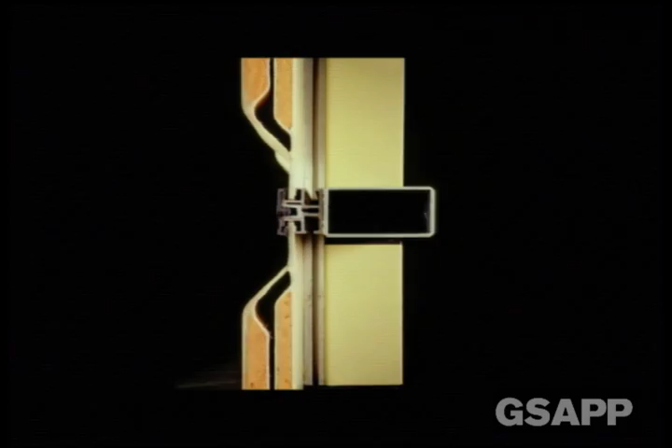We got the big job, or possibly one of the best jobs in Europe at the time, which was the international train station at Waterloo, connected to the Channel Tunnel. Very exciting job to win. We fought tooth and nail to get it, and it took us the best part of 5 years to do.

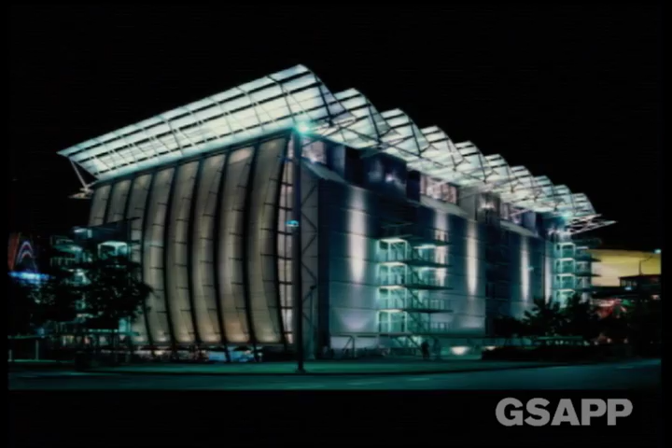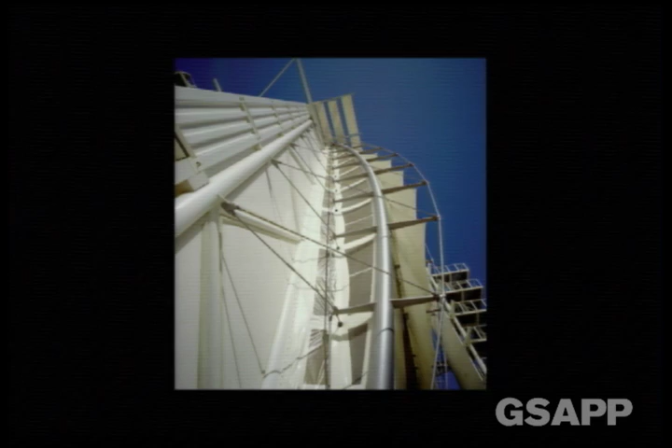Finishing it in '93. At the same time as that was going on, we won the competition for the British Pavilion in Expo 92 in Seville, and that whole project was based on the idea of energy saving, sustainability, and recognition of how architecture could work to help climate issues. Spain, Seville particularly, being the hottest city in Europe, but people had lived there quite happily for centuries.

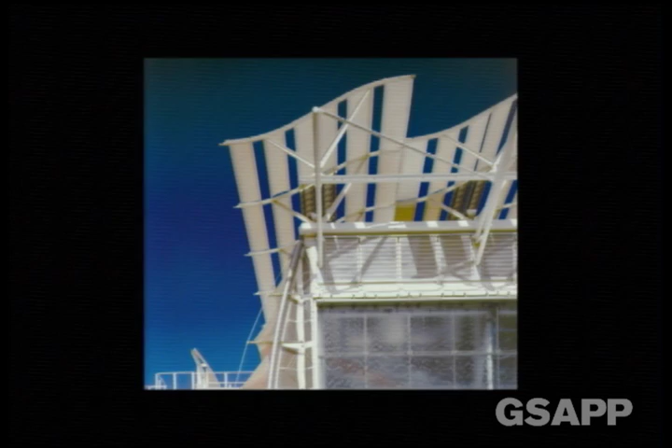So it wasn't an impossible environment to live in. We had to show, well, we tried to show how modern materials and modern technology could be used to make an acceptable environment. So there we are, sitting with these two pretty experimental, quite daring buildings behind us, and we started to expand and be recognised abroad.

It drew us to our first building in America, which was the Plant Science Centre in St. Louis, I should say, for Americans present. And that building itself was an interesting exercise.

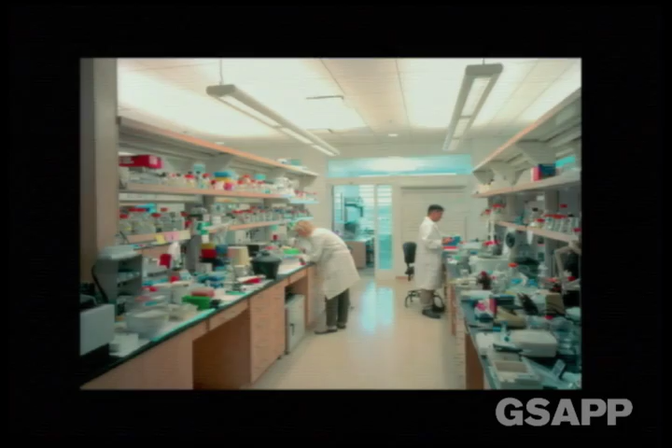Because we had the key thing, which of course was the laboratories, but we had to use the building to try and make an acceptable environment for the people working there, mainly hundreds of PhDs, who were in a pretty remote site in terms of America and in terms of St. Louis.

And we had to make their life acceptable. So we made quite a grand environment in terms of an atrium and a really nice lecture hall and library and so on. But we tried to, although this was a highly modern building, make it a really humane background. So it was technology working for human beings, in my view.

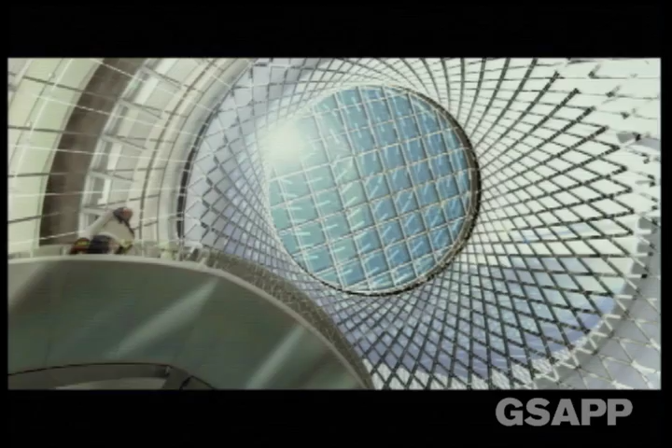And I think Andrew will be saying a bit more about this later on. But our life in America then went on, and as you know, we're about to open the Fulton Center, which is a huge transport exchange downtown. We've done the Queen's Art Gallery, converting the ice rink that was Flushing Meadow into a fine new art gallery. We've done Via Verde, which was quite an experimental scheme in low-cost living with planting on the roof.

I suppose a lot of our work has been in the field of public buildings. I like to say the public good, buildings for the public good, but a lot of it has been in transport, which the public does experience on a very big scale.

And I don't know, I may be naive, but I feel that if people go to work every day and they pass good details, it makes them feel better. If they see a horrible, cheap, bland building, it makes them feel worse. Perhaps I'm naive, perhaps that's a subject for discussion, something Andrew might dwell on a little later on. Anyway, I just would like to end by saying that we're a dedicated group.

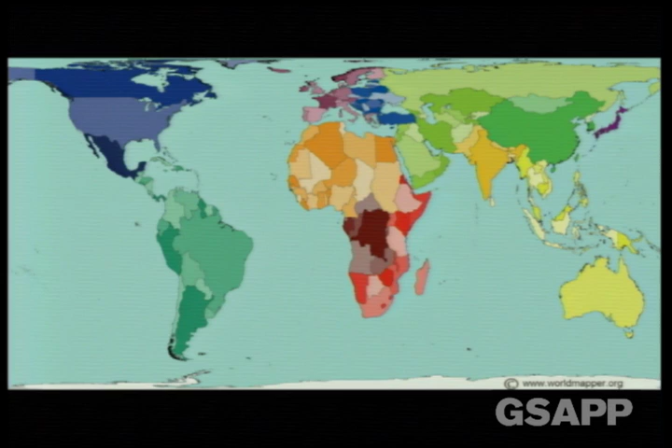So this is the way we're used to seeing the planet mapped from a 3D to a 2D projection. This is a different way of mapping it, instead of landmass, by population. And so what you immediately read is that half the population are living in one part of the planet, so we have some very dense areas of population.

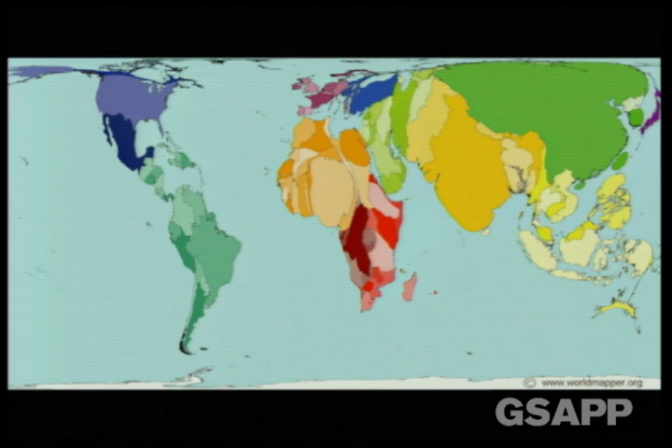But I find it even more interesting to then map against time. And to think of the planet as 4.54 billion years is a difficult thing to comprehend, and what our impact has been on it in that time.

So if you think of the planet and those 4.5 billion years as a year, then it's much more understandable. Basically humans appeared, as far as we can tell, 15 minutes before midnight on the last day of the year. And the start of recorded history is actually 30 seconds before midnight.

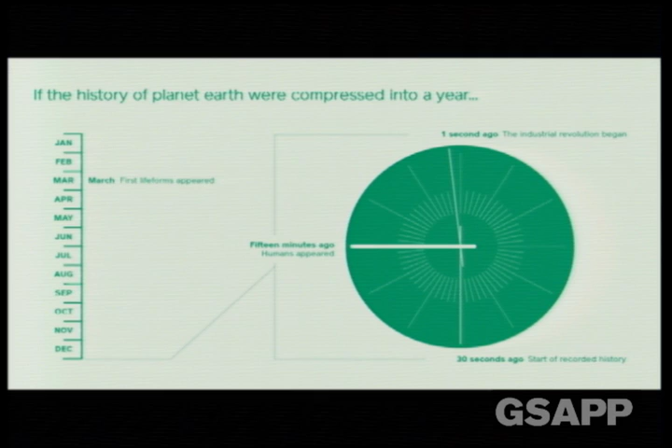But the most important part is the Industrial Revolution. Within the time frame of a year on the history's life, it happened 1 second before midnight, which means the whole impact of global warming and what we've managed to do over the last 2 generations happened within about a blink of an eye within a year.

I was tempted to talk about weird architecture, but I'm not tonight. So I am going to talk about nature and things that I think could inspire us to look for solutions.

For me, a few years ago, I went on a research trip in the Amazon. We've done, obviously, the Eden Project, and some other similar projects. And I had the good fortune to explore and spend time in that part of the world with a very famous biologist called David Campbell, who's written many books. This is David here, on the Amazon.

And like many, I'd rather foolishly believed that the reason it's the most biodiverse part of the planet is because it has a very rich set of nutrients that can support this rich, biodiverse set of life forms, plants, animals, insects, etc. And of course, this tree tells us that actually it's all built on a few inches of very sandy soil with almost no nutrients, hence why you have buttress trees and so on.

And the reason it can actually survive and support that ecosystem is really 2 main parts. One is that it's extremely efficient in how it uses resources, but also it's ingenious in how it uses those resources. For me, those are the 2 areas we need to focus on - it's not just efficiency, but ingenuity. And if you ever get a chance to read David's book, A Land of Ghosts, it's a very inspirational piece of writing.

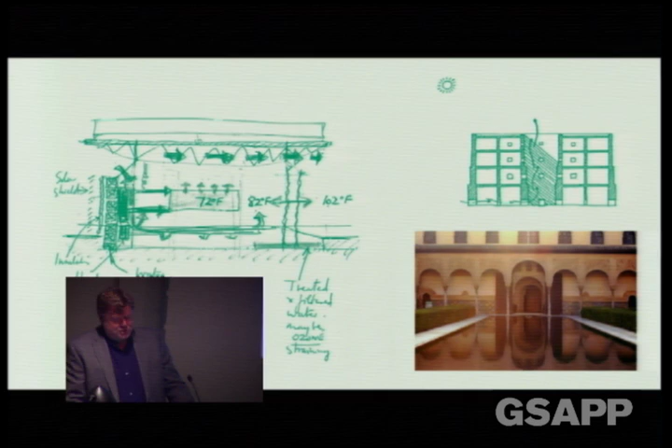And you see he still works in Fahrenheit, which is very nice. The outside is 102 in Spain, generally, often. The idea was creating layers and buffers rather than trying to condition a space, and trying to create an ecosystem that really also learned from the prevailing traditional architecture, where often what you find is there's an understanding of how you can create microclimates.

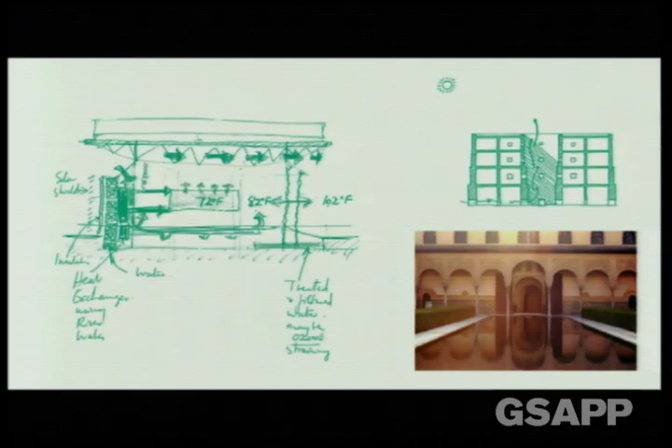Another example of a project looking at how you can actually use, if you like, solar gain as part of an environmental system. This is another kind of experimental project we did. Of course, you'll know that PVs aren't particularly efficient, they're only 18% to maybe 20% efficiency, whereas if you can actually use heat, it's a much more effective way of harnessing the sun.

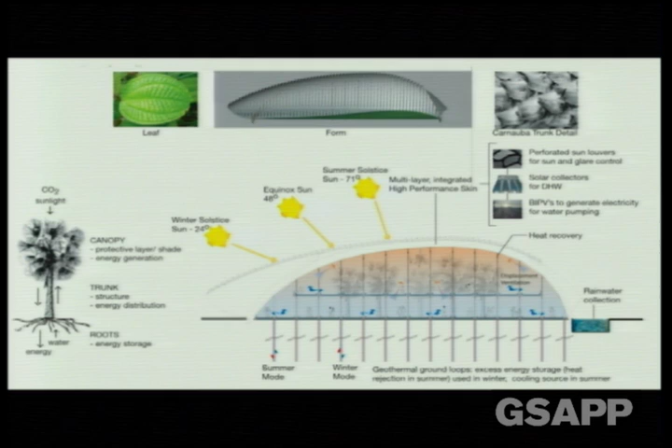We were really intrigued on how you could effectively create a roof structure that might, through a biomimicry way, use photosynthesis to create energy and run the building systems. Here we were using very efficient solar collectors, up to 80% efficient, to generate a great deal of heat that could then be used as part of a heat storage system for the colder part of the year, but also as part of an absorption chilling system. So we were using the heat to cool the building.

It was very much an experimental idea, but it's something that we're now taking on, particularly in the Middle East, as part of an energy solution where you can actually use the sun to cool a building and create a building that can run almost as efficiently as a building in Europe.

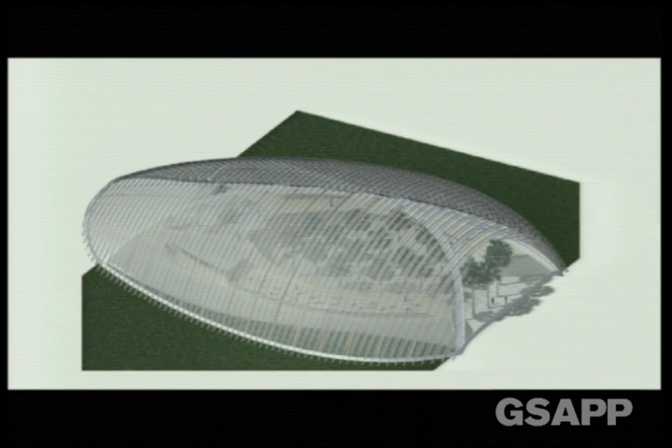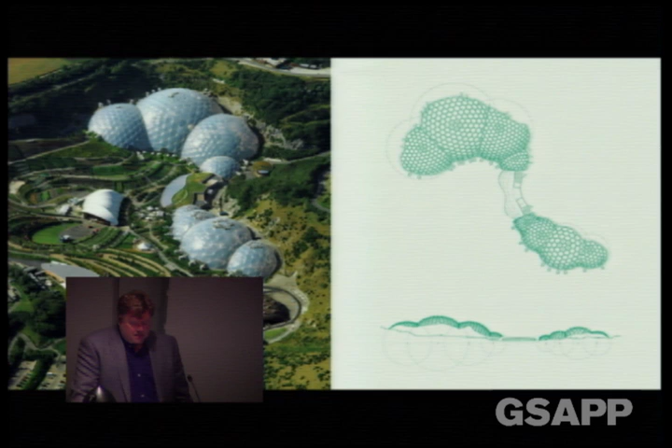So for my next theme, natural structures, looking at how we draw upon nature as an inspiration for efficient and very lightweight structural forms. Nick mentioned the Eden Project, which is a project I worked on for about 10 years from conception to final execution. There's actually a connection to New York, because when we set the New York office up, we set it up with a core team that did the Eden Project.

This was to celebrate the millennium. It was to look both at the UK's interest in botanical gardens and research into plants, but also to look forward to a future where we had an understanding of our relationship to the planet and the important part that plants play in that. Our brief was to create very large enclosures where we could create an entire tropical rainforest, the humid tropics, and different environments. The site was a disused clay quarry in Cornwall, in the southwest of England.

So it was quite a challenging site. It won't surprise you it was often used for science fiction films because there weren't many plants, it was this sort of white lunar landscape. We started with this as a site, very challenging, and the contractor looked at me and said, well, man has spent 100 years digging this very big hole, you're now asking me to fill it and reconstitute it in 18 months. So often it's a challenge, but that's what we did.

But again, for the enclosure and the buildings, the inspiration was very much about natural forms, and you see that throughout the buildings. I had an interest in a material called ETFE foil, ethylene tetrafluoroethylene, which is a polymer that's very lightweight, very strong and transparent.

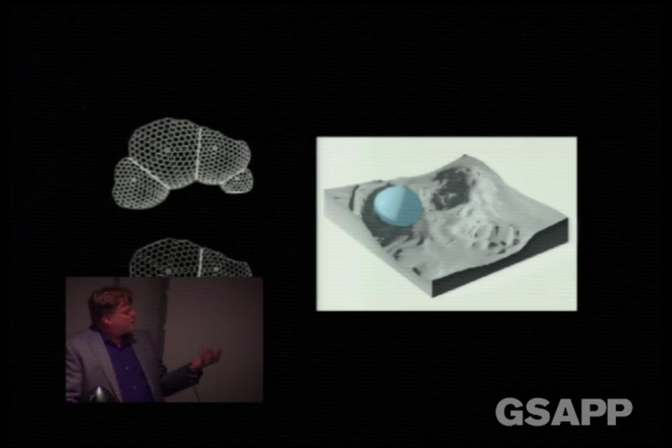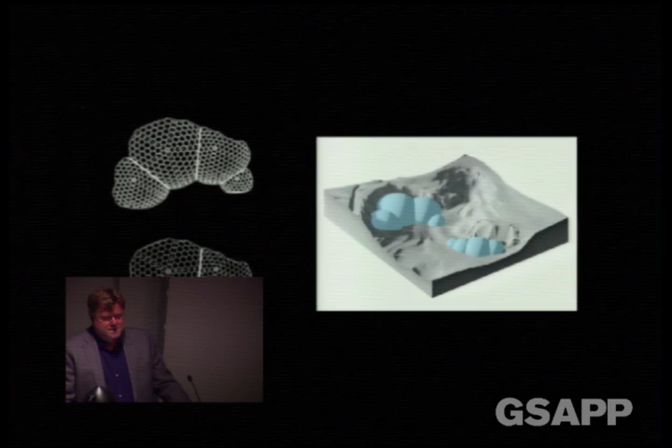So we took the site, the quarry, and modeled it in 3D and actually generated the buildings out of a series of spheres, and then took those spheres and interconnected them and then molded the enclosure and the topography. That's how we generated the whole form of Eden. It created the kind of maximum efficient enclosure, maximum space to the minimum surface area.

Throughout the building, you see how the structure is informed by natural forms. The way each of those elements join together is exactly the same way a dragonfly's wing works, with the same cellular structure and connections.

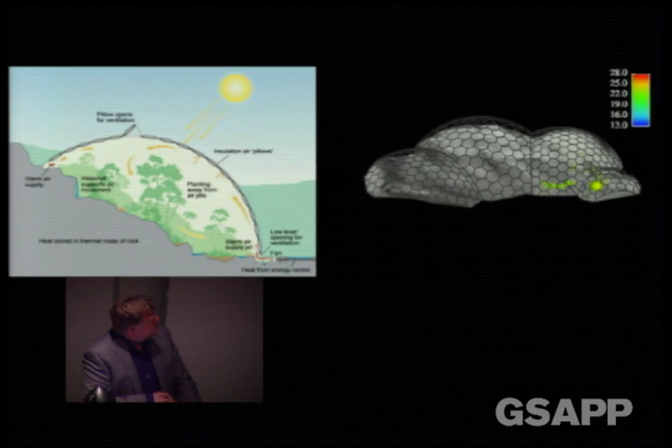That was the structural form, but we also used that form as part of the environmental system, modeling how air would move around the building. The size of the spheres relates to velocity and the color to temperature, looking at how we could use the building itself to direct the air and condition the space. I have to admit, it does look a little bit like a family planning video, but anyway, we'll move on.

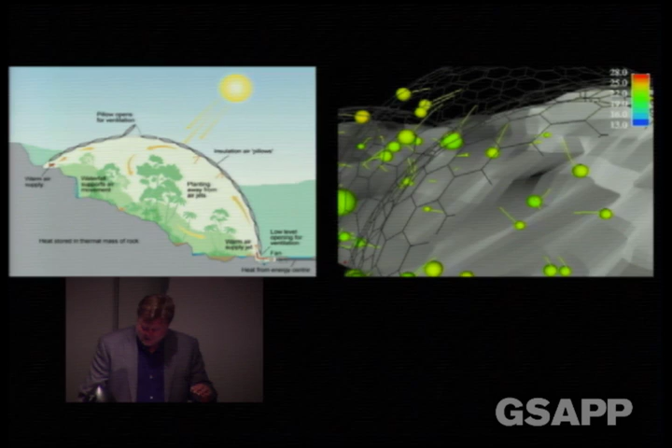Ultimately it was a very lightweight, very efficient structure with minimum environmental control systems. The steel tubes, the largest covering the 120-meter span, were only 8 inches in diameter, so quite lightweight. But ultimately it was really about ingenuity, about using the topography as half the architecture. We created the lightest weight enclosure to encapsulate this beautiful natural form, and it's the topography that gives the building its vibrancy. The end result is that the whole building weighs less than the air inside it, meaning we used a fraction of the material a glass and steel building would use—so it's also doing things as efficiently as we can environmentally.

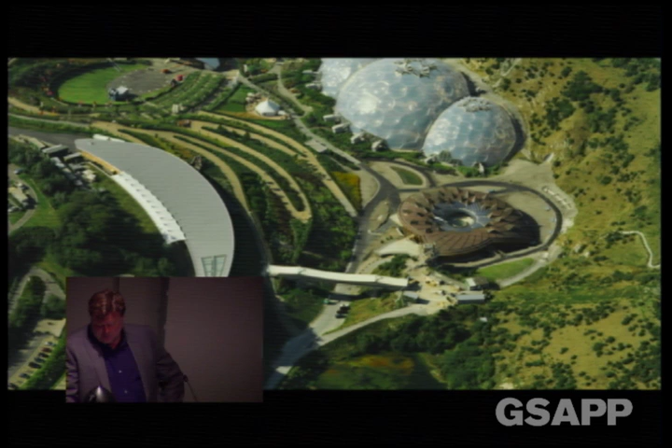We've had a great ongoing relationship with Eden, working with them for 12 years now on many buildings. One of the latest is the educational core. The lovely thing is that they have, at times, up to 2,000 school children a week coming to do some of their science curriculum at Eden. You can imagine it's a much better way to inspire a child to be interested in science to spend a day in the rainforest learning about biology than in front of a blackboard.

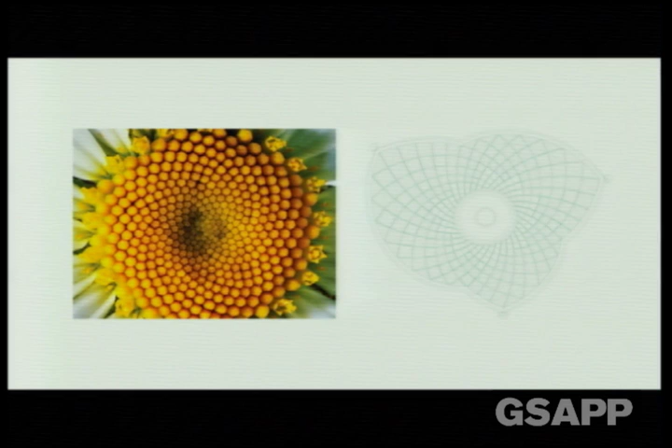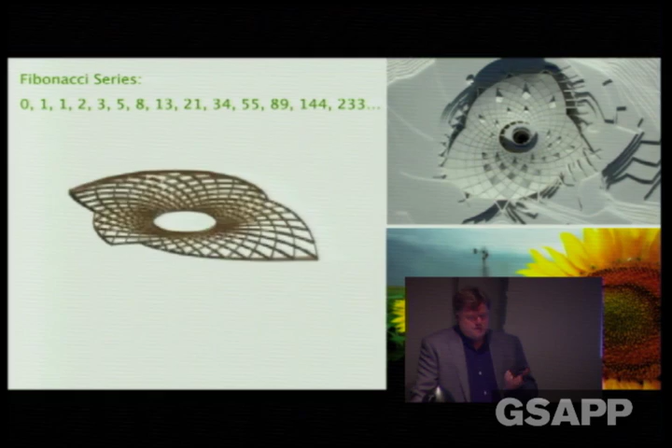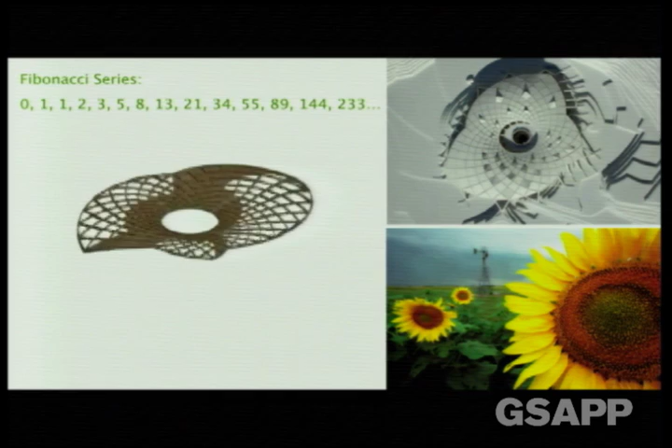So the idea of the building was to use its form itself as part of the teaching tools. The whole geometry and structure uses a Fibonacci sequence called the phyllotaxis spiral, a geometry found throughout nature as the most efficient way of packing in the maximum number of cells—the way a sunflower or many flowers grow outward. That's the geometric sequence we used to create the glue-laminated roof structure for Eden, so the building not only provides the facility for learning but tells the story of phyllotaxis, photosynthesis, and transpiration inherent in the building itself.

The next topic is connecting with nature, the biophilia hypothesis that E.O. Wilson put forward several years ago, and the importance of having a connection to nature in cities and throughout the places we work and live. It's something we feel is very important.

Eden is, of course, easy because it's all about nature, but even the very first building we built there used materials from the site—Gabion rocks, and clay extracted and turned into rammed earth walls. The whole building really grows out of the site, so as you walk through the spaces you're surrounded by the warmth of rammed earth and timber, giving you that real connection with nature.

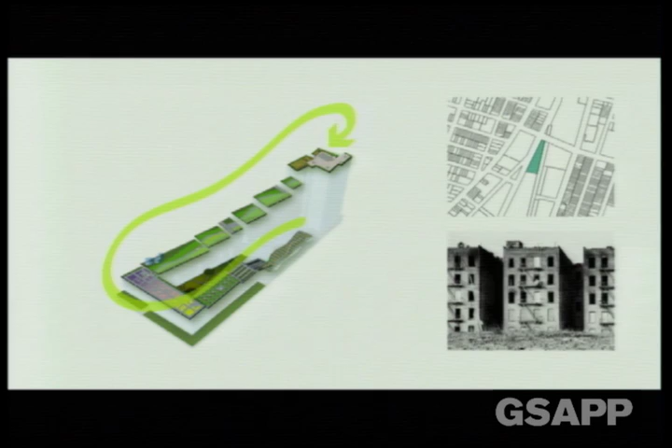And it's great to see it now emerging as a really vibrant part of New York. It's very rewarding for us to play a small part in that process. So we felt it was important to preserve those green spaces, but also allow people to have contact with them and create a kind of oasis.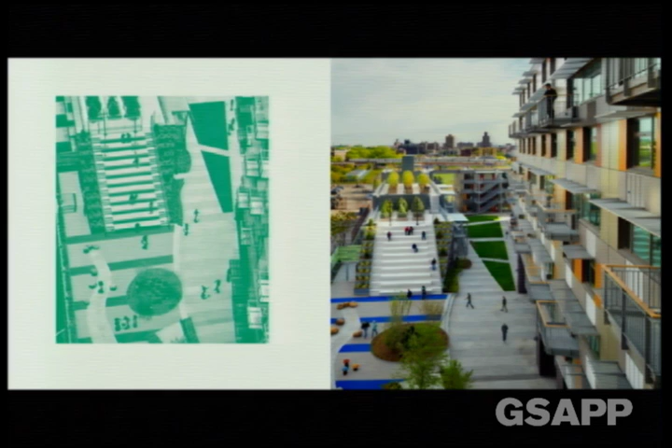The brief was for a whole series of different levels of subsidized housing, from rental housing to different levels of affordable-to-buy housing. There's an excellent book being produced by Lance Brown on the whole process, going through all the other competition entries and the evolution of the story. The interesting part is I think we were the only team that combined all of those different groups into one building, creating one community.

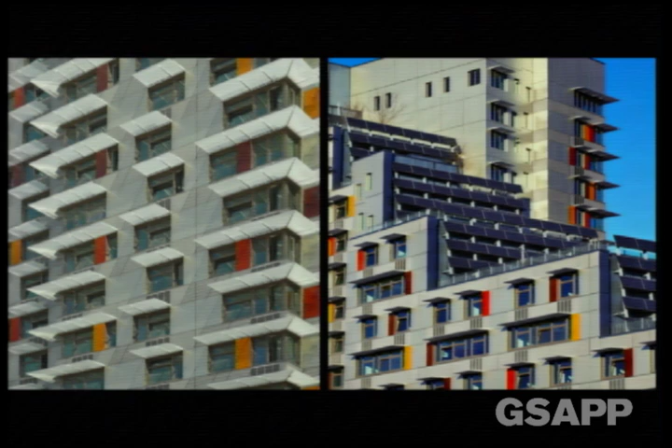I could talk about the prefabrication systems we used to keep the building cheap but efficient and well built. We had to build it for the same budget as New York public housing.

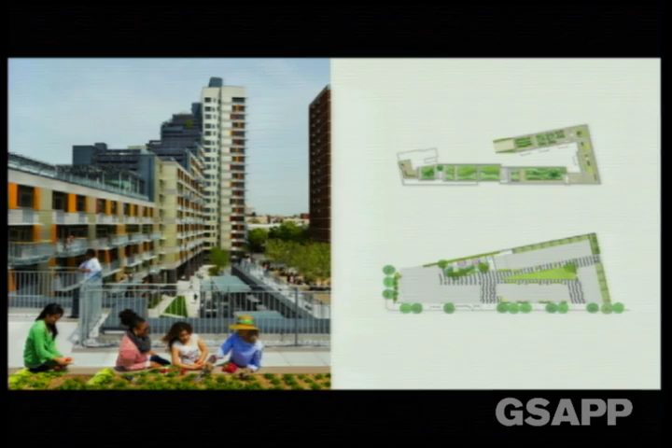But the one thing I really wanted to touch on with this project was the roofs and terracing gardens. Not only does it provide different facilities - an orchard, production gardens, recreation gardens - but it really forms the heart of the community, where people are growing food, and there's a farmer's market at the weekend where the produce is brought in. That connection with nature is as important as all the other aspects of the building, and it's something we look at in many different guises.

Earlier on you saw the Queens Museum of Art, which was very much about how you create a museum in a park setting and create a connection to the park. Finally, in two weeks' time, we're opening the Fulton Centre.

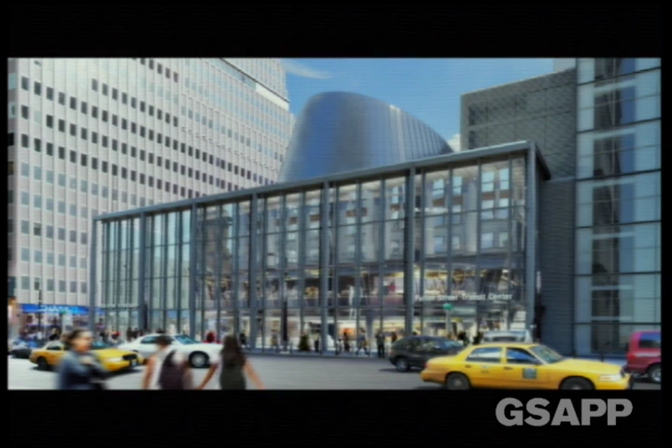I first came here to work on it in 2003, where I was told I had to move here within four weeks because it was a very urgent, rapid project. I had to move my family very quickly. We got here already with sleeves rolled up, and we're now finally opening it eleven years later. So not quite as fast as I thought, but the one thing I've learned is patience in New York is sometimes very important. But it was worth the wait, I think.

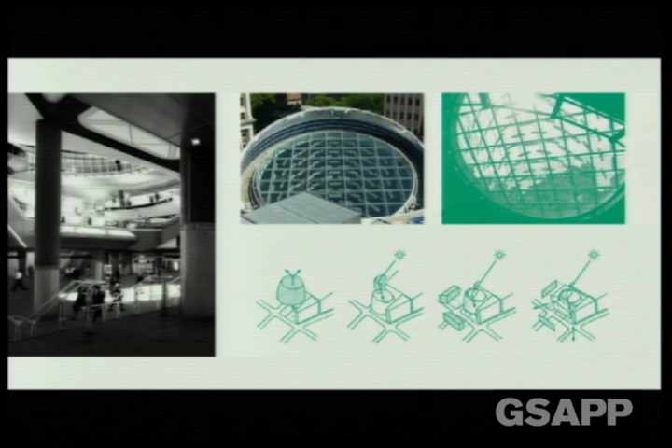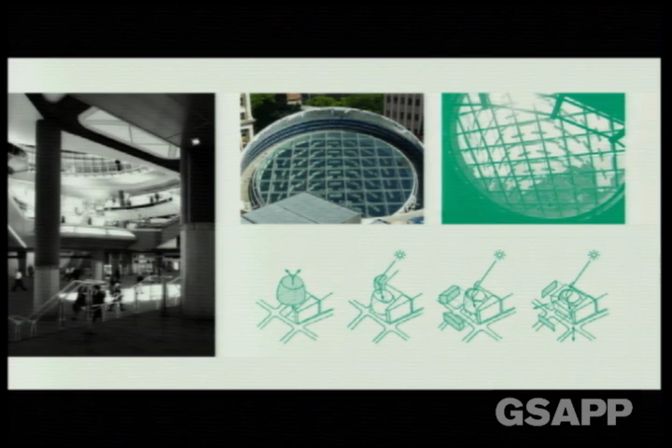The interesting part is, because it was federally funded, you can't do an overbuild for various legal reasons. So it's unique down the Canyon of Heroes that there won't be a tall building there - it has access to the sky, and that was a real opportunity we wanted to take advantage of. Where many subway systems have egresses through other buildings, we wanted to use the fact that we had access to the sky, creating a hub that connects all of the subway systems down in this part of downtown Manhattan.

So right from the beginning, we came up with the idea of creating a device that could capture the sun and reflect it down to the lowest parts of the subway system. Just to orientate you, this is street level, here's the main head house building, and then we have this structure that supports a lightweight reflector on a cable net that bounces light down to the lowest parts.

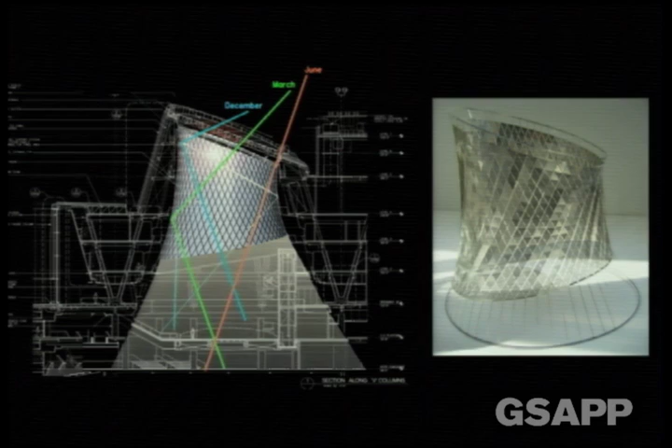The important thing to emphasize is that these projects are all about collaboration. On the Queens Museum, we worked closely with our colleagues at Buro Happold on the light reflectance and how that might work as a system. In the same way, here we worked with Arup, modeling the lighting and looking at how the sun would move around the site and how we could shape that reflector.

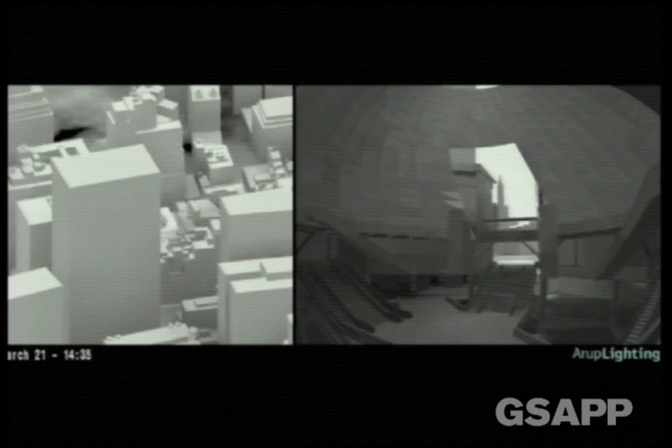We went through many iterations, I have to say - you can spend a lot of time designing over ten years, especially when the client keeps changing the budget. But the net result was a very efficient final execution that kept the original concept.

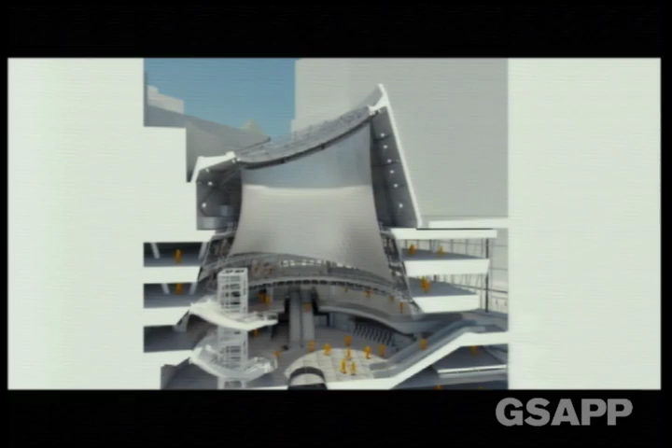I've got some short bits of film for you, which gets the idea of the cable net.

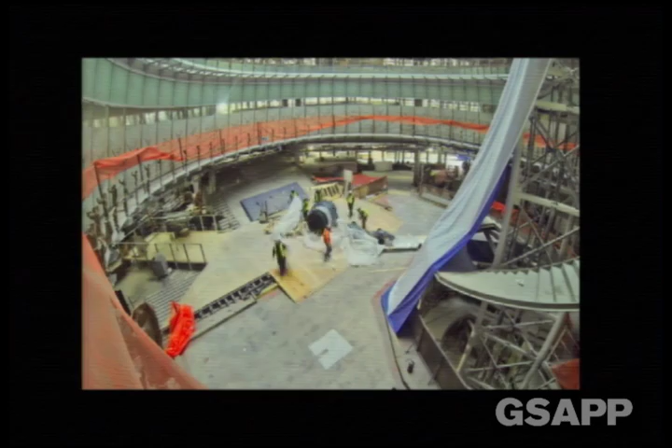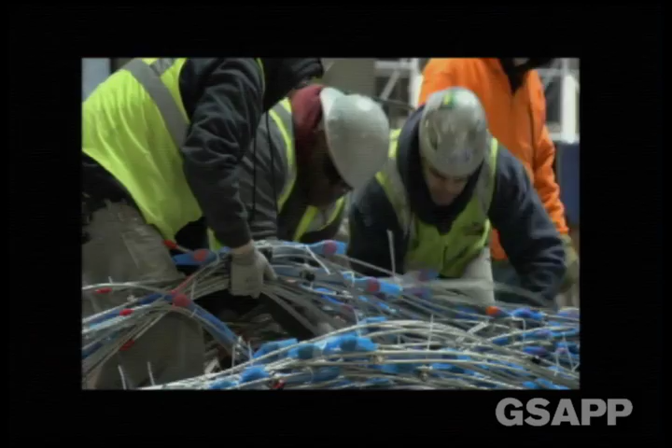So here, the cable net, we worked both with Arup and with the engineer Schlaich on the net itself. And it was a collaboration between ourselves and the artist Jamie Carpenter, because once we had the idea of this light reflector, Jamie was brought in as part of the Arts for Transit program.

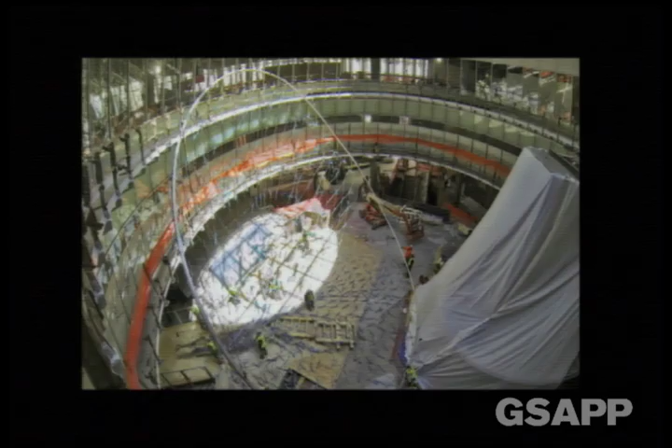We worked together very closely on how that might actually work. He looked at how all those reflectors might capture light, and other devices might be brought in. So it became much more than just a device for lighting the space below; it became a whole artistic and sculptural interpretation of that concept.

The wonderful thing about this is that it literally happened over a period of just a few short days, because the cable net had all been fabricated off-site. You literally just bring it in, raise it up on two hoops and stretch it, and it naturally forms the shape it had been designed to take on. Then once that was in place, we could hook up all the polished aluminium reflector panels.

These are all perforated to different levels, with the idea being that when you're down below looking up, you actually just see it as an optical device, which you can see here.

But there are two levels of program that sit around that, which have different uses. When you're in those, the skin is quite transparent, so it's almost like looking through a veil. So we have this nice optical device where you enjoy one space inside the main public hall and have a completely different experience from behind.

So as I mentioned, I think we're just two weeks off. It opens to the public at 5 a.m. on the 10th of November, so you can all go down and see it then for real. You don't need to take my word for it.

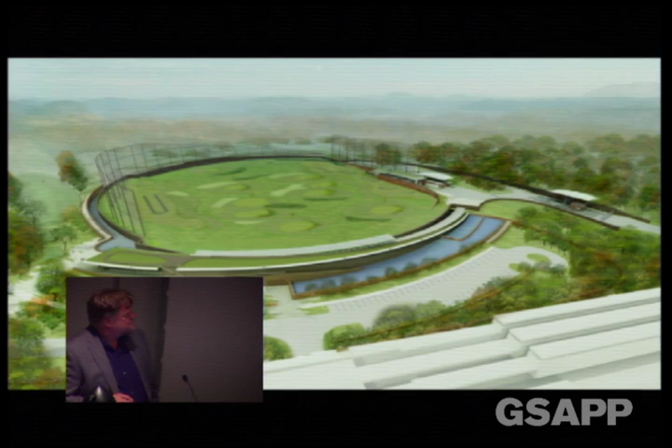Naturally, the users of the park weren't so happy about that. So our role was to make the whole thing disappear and create a new program on top that also provided all the security, because it's a highly secure facility. The initial concepts were to have very high fences and barbed wire and lighting, which equally doesn't fit in a park very nicely.

So we took, I guess, a lesson from Capability Brown and used a whole series of landscape elements in the form of ha-has and moats and ponds to create all the security. This will be the world's most secure driving range, because it has 24-hour armed police, but you'll be able to enjoy driving your balls onto the roof of the facility. What protects it are all these ponds that circulate around it.

We were really using it also to demonstrate how you can use plants and ponds as part of an overall ecosystem. This will be one of the largest green roofs in North America, so of course you have an enormous amount of water runoff. We collect all the water at one pond at one end, and then it gets pumped up to the top of a series of inclined ponds that wrap the entire facility.

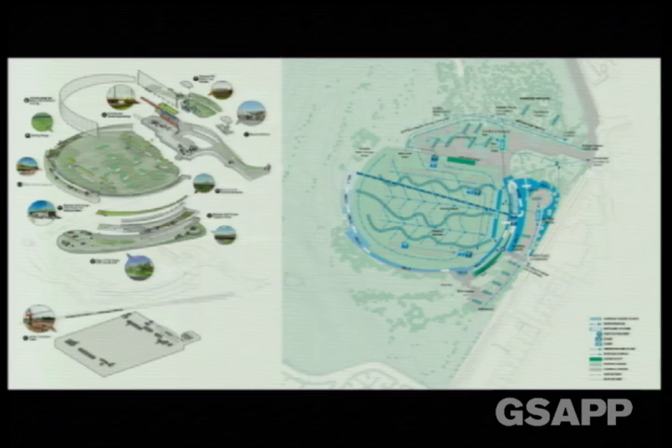It takes about a week for the water to go through each of these different ponds around the facility, with different plants carefully selected, forming part of an overall ecosystem. At the end of the day, the water is stored and then reused as part of the irrigation for the park. So it's really using plants as effectively an environmental system.

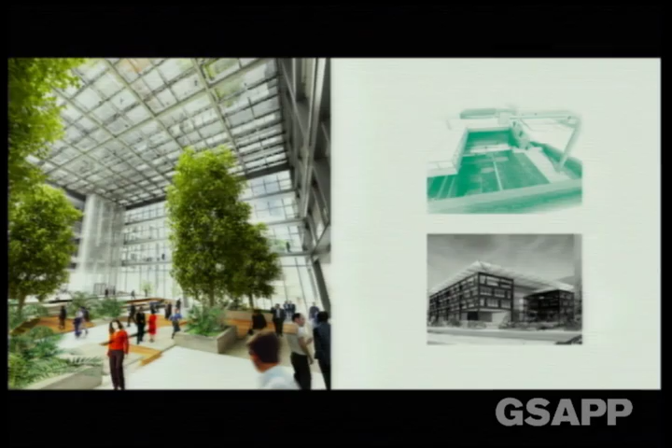It's something we're keen to do not just in landscape environments, but also within buildings. This is exactly the same kind of process for a building we're currently working on in Mexico, where instead of having just a landscaped atrium, the atrium is a series of ponds and different planted ponds that actually form part of a water filtration system.

Moving on rapidly, harnessing the wind is something we can all look at, and I'll talk later about ventilation systems. But the other thing we're very interested in is working with infrastructure.

We're working on some quite large-scale power stations at the moment, and looking at waste to power. I think it's something I'd encourage architects to engage with. It's been left for far too long with engineering groups who are focused on efficiency and how these buildings work. But how they work as part of a city, and how they work visually and how they sit, is very important.

What's happening more and more is these facilities have to come closer and closer to cities. We can't just stick them out in areas where no one worries about them too much. And the closer they come into cities, the more important the design and thinking about how they sit within those cities becomes.

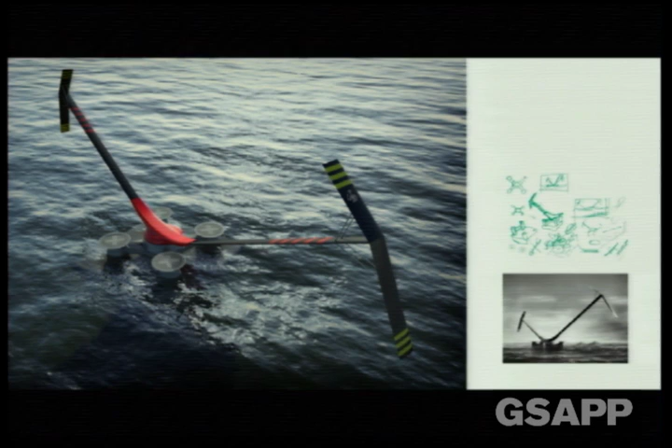This is a research project we've been working on for a little while, looking at a vertical axis wind generator, inspired by a sycamore leaf and seed and how it falls and spins. The benefit of a vertical axis system is that it doesn't matter where the wind blows, it's always in the right direction.

More importantly, all the weight and all the maintenance is at ground level where you can get to it. Part of the UK is looking very seriously at offshore wind generation as part of our renewables policy, and this is one of those initiatives.

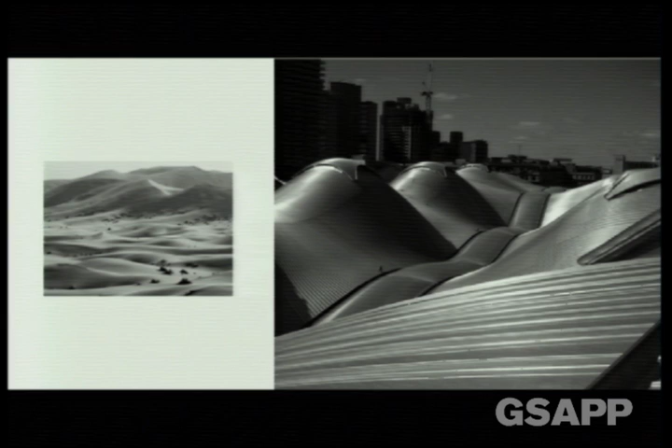But maybe that's a kind of obvious, direct way. Within buildings there's all sorts of opportunity too, again looking at natural forms. So this is a railway station we did in Melbourne.

It's part of an overall urban regeneration program, and we're working currently on several similar projects in different parts of the world. What you find is railway lines cauterize a city - you're either on the right side of the tracks or the wrong side. So there's the central business district, basically stops at the railway lines. As happens in many cities, these were the old docks, which have now moved to deeper water facilities, and this area is now completely regenerated as a new part of the city.

So there's a whole urban discussion about how you can plan and how you effectively lift over or under, and reconnect and reknit the fabric of a city.

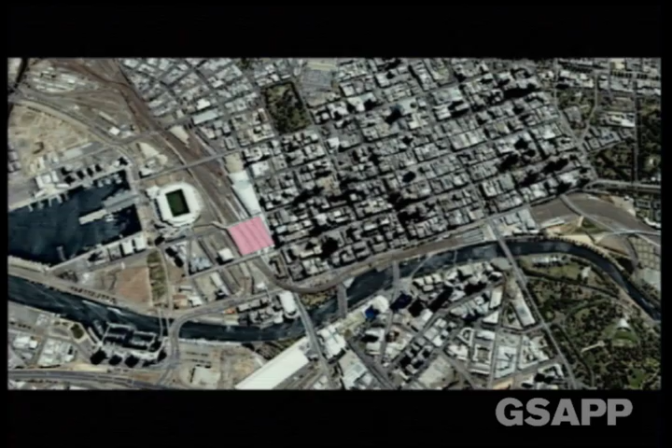But for today's talk, I'm just talking about one element of that, which is the environmental system. And of course the roof becomes a fifth elevation, because when all those new buildings generate around it, they'll all be looking down onto the roof. So it's an important visual tool.

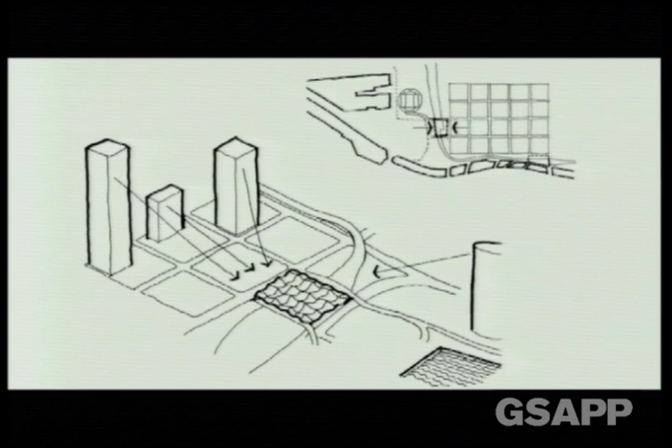But I think it was the engineer Schlaich who said, just because you can doesn't mean you should. Now we have all these computer generative tools, there's a tendency to make shapes just because you can make a shape. From our perspective, it's very important that everything has an embedded purpose. So here, it's not just about creating a curved form because we thought that would look elegant and interesting. The form is generated by how it works, in the same way as nature does everything in a very deliberate way.

In the same way I started off showing you sand dunes - sand dunes or moguls are created through wind, and effectively we're reverse engineering that. There are two very strong prevailing winds in Melbourne, and by having this offset mogul field roof with a ventilated triple skin for the enclosure, the roof form itself does all the cooling for the building and also all the ventilation for the trains below.

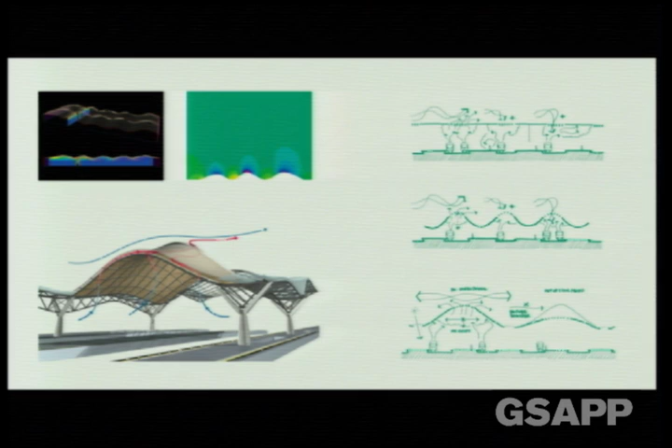So it meant we could change the government's reference scheme, which was for a roof covered with mechanical extraction equipment - there is absolutely no mechanical equipment at all on the roof. The entire environmental system is actually provided by that roof form and shape.

So I'm just going to talk about two further points, in the interest of time. Urban ecology. I started off with the statement about the growth of cities and the challenges we face.

There was a tremendous exhibition at the recent Venice Biennale from Singapore. I was in Singapore a couple of weeks ago, and it's a city we're currently working in, a city I greatly enjoy going to.

In the 1960s, they produced a planning manifesto, and it was the city in the garden. More recently, it's been reappraised, and they constantly do a reappraisal cycle, and they're also now looking at it as being the vertical garden city. But since its inception, and its 50th year is next year as a city and state, it's actually become greener as the population has grown.

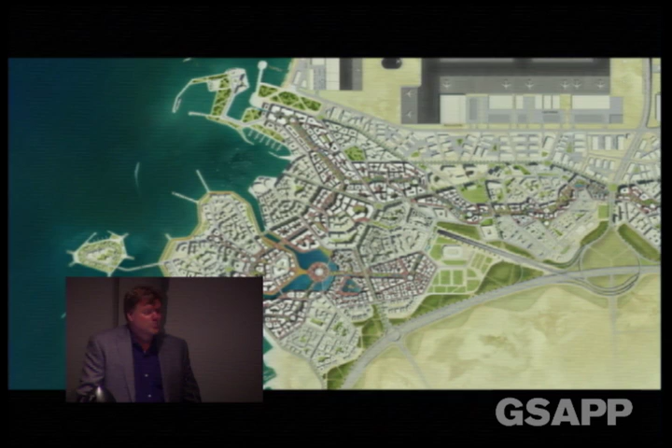So finally, just to wrap up - I talked earlier on about the Eden Project, and how all those school children go every week to learn about nature and science. That's one of the things I enjoy in a lot of the projects we get to do, is that opportunity, hopefully, to inspire.

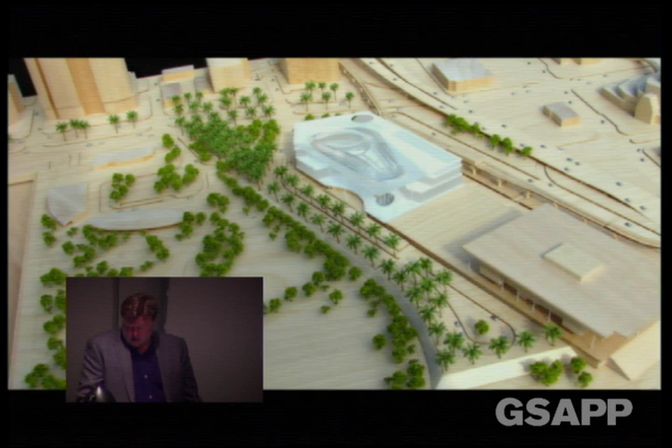Currently, in the New York office, we're working and building a new science museum in Miami. It's part of an overall regeneration, a creation of a new park. Herzog and de Meuron have already finished the new contemporary art museum, and we're doing the new science museum. It's interesting in that it uses natural history, ecology and the environment to teach science.

The building itself was really very much inspired by its setting in Miami, a city that enjoys partying, enjoys the outdoors. It's a very vibrant and young city, but also has an interesting weather pattern in that it's reasonably benign. But throughout the summer, rapidly during the day, you can get a sudden change in weather, going from a hot, humid day to a sudden influx of torrential rain.

So we wanted to create a building that could be very much in contact with the outside, but yet could deal with that. In a way, the building is almost like a series of landscape elements - it's actually carved out of solids. We looked at how we could capture the sea breezes, how we could capture the rain, how we could capture different environmental elements to condition the building.

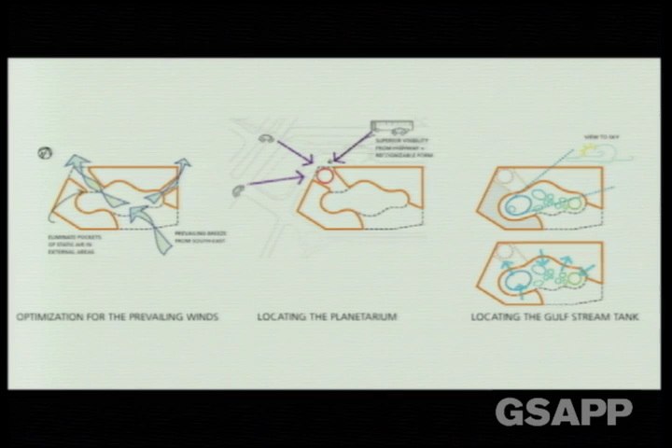This is where I think new computer parametric modeling really can be a very useful design tool, because it allowed us to test out all the forms and shapes, and create and effectively sculpt the most efficient different sets of shapes to deal and use all of those prevailing elements on the building.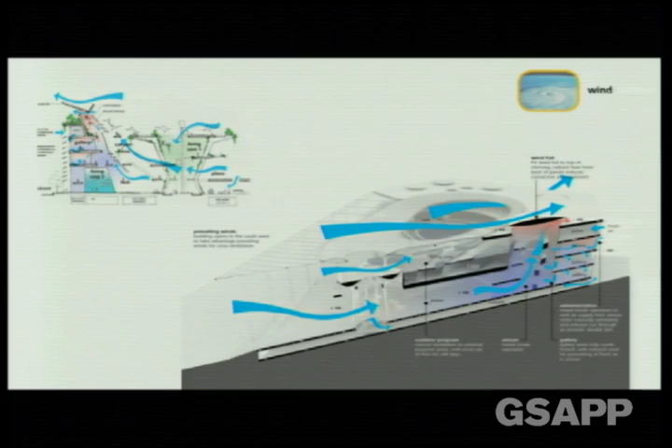So it really is kind of carved out, if you like, to create a landscape. And the centerpiece is this aquarium, where we have an interesting optic, and it creates the gulf, effectively.

So we looked at the optics, and basically by having this shape, it means that when you stand below and look into the Gulf Stream, you can't actually see the sides of the tank. All you see is kind of infinite space spreading out and the fish circulating. I guess the inspiration probably was one late night in New York, with a kind of martini glass, but that's just a story.

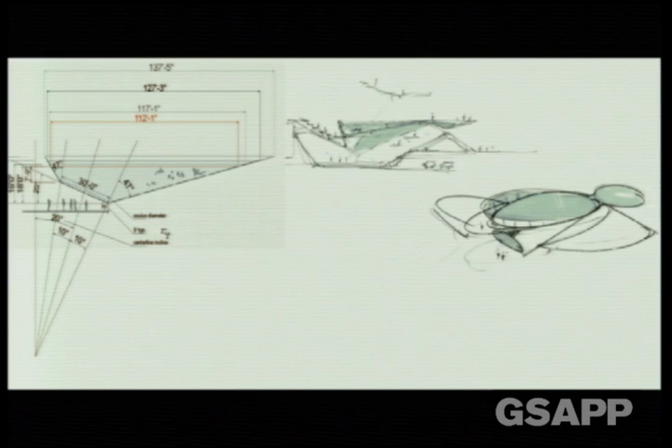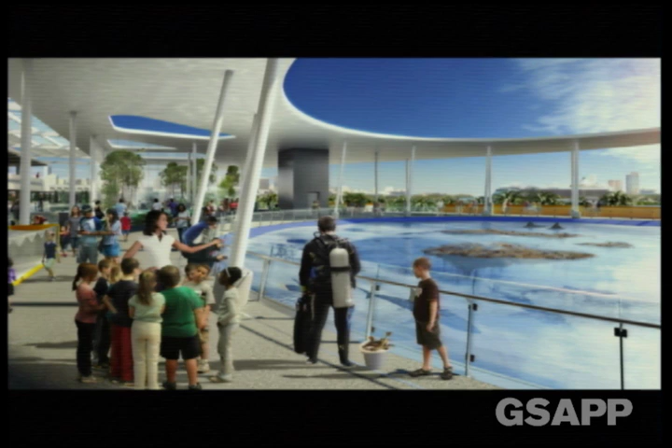So this will be our next main cultural building that we're just now completing. And again, I think it'll be an enjoyable building, I hope to use. It'll have all sorts of interesting aspects to it.

And of course, we were told right from the beginning that Miami is a party city, so we have to be able to host parties and host events. This is an event going on below the aquarium, where everyone's watching the fish above, eating the seafood, and raising money for the museum.

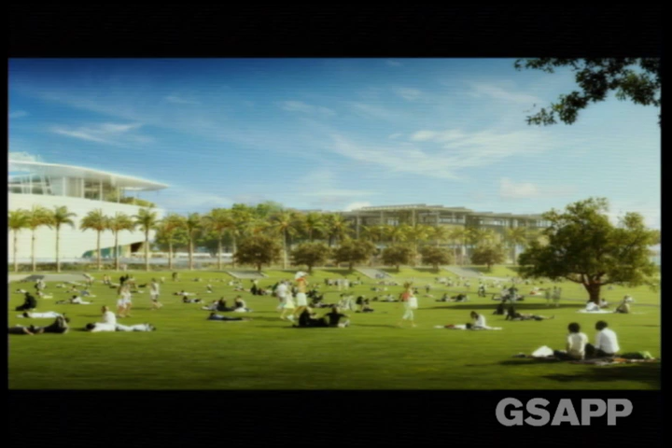So, but I think that really it's also about the impact you can make as an architect in not only creating environmental responses to buildings and creating cities, but also hopefully actually inspiring the next generation to take the challenges that face us and come up with exciting and innovative solutions.